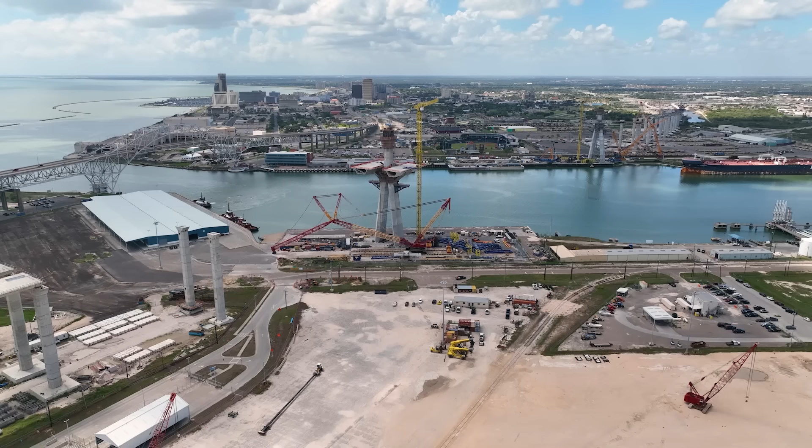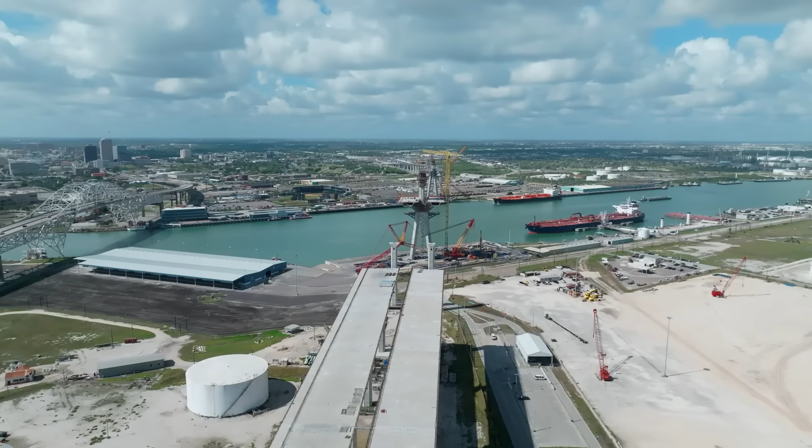In July of 2022, the Texas Department of Transportation issued an emergency suspension of work on the half-finished Harbor Bridge project in Corpus Christi, citing serious design flaws that could cause the main span to collapse if construction continues. The bridge is a high-profile project and, when constructed, might briefly be the longest cable-stayed bridge in North America.

It's just down the road from me, and I've been looking forward to seeing it finished for years. But it's actually not the first time this billion-dollar project has been put on hold. In a rare move, TxDOT released not only their letters to the bridge developer, publicly castigating the engineer and contractor, but also all the engineering reports with the details of the alleged design flaws.

It's a situation you never want to see, especially when it's your tax dollars paying for the fight. But it is an intriguing look into the unique challenges in the design and construction of mega projects. Let's take a look at the fascinating engineering behind this colossal bridge and walk through the documents released by TxDOT to see whether the design flaws might kill the project altogether.

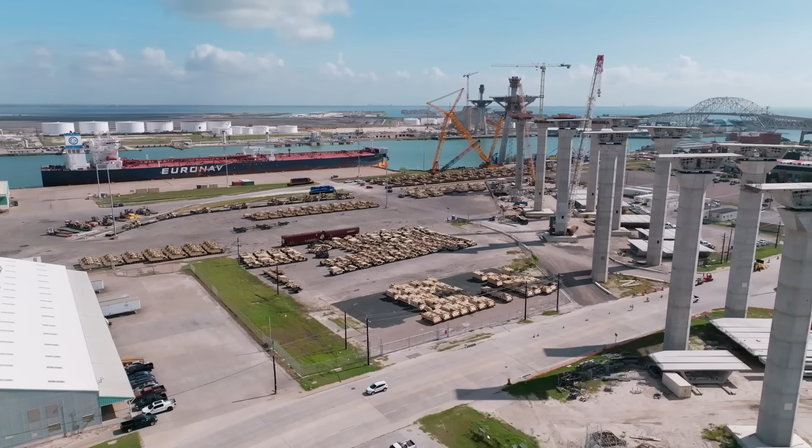Corpus Christi is a medium-sized city located on the Gulf Coast of South Texas. But even though the city is well down the list of the largest metropolitan areas in the state, it has one of the fastest growing cargo ports in the entire United States. The port of Corpus Christi is now the third largest in the country by tonnage, due primarily to the enormous exports of crude oil and liquefied natural gas.

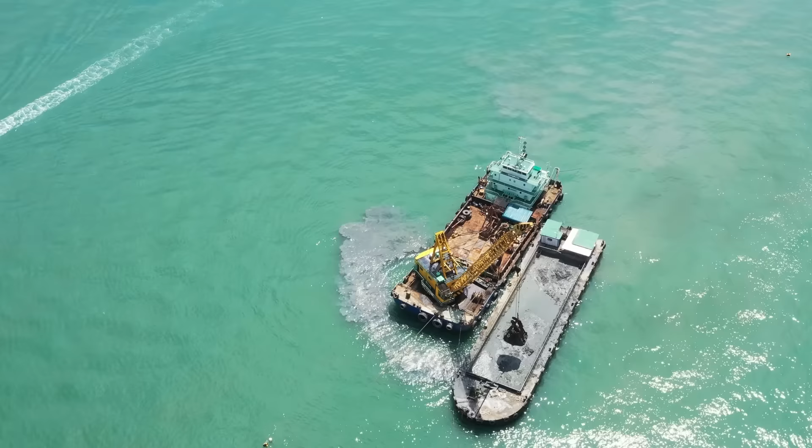But there are a couple of limitations to the port that are constraining its continued growth. One is the depth and width of the ship channel, which is currently in the process of being deepened and widened. Dredging soil from the bottom of a harbor is an engineering marvel in its own right, but we'll save that for another video. The second major limitation on the port is the Harbor Bridge.

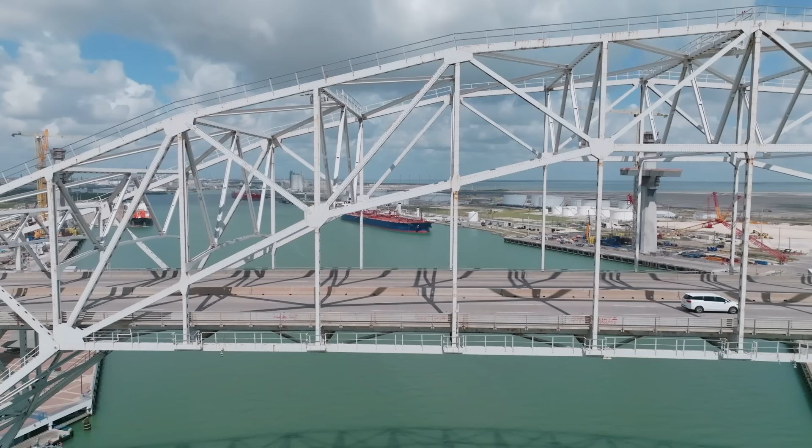Built in 1959, this bridge carries U.S. Highway 181 over the Corpus Christi ship channel, connecting downtown to the North Shore area. When it was constructed, the Harbor Bridge was the largest project ever to be constructed by the Texas Highway Department, later known as TxDOT. It was the pinnacle of bridge engineering and construction for the time, allowing the Army Corps of Engineers to widen the channel below so that the newest supertanker ships of the time could enter the port. The Harbor Bridge fueled a new wave of economic growth in the city, and it's still an impressive structure to behold, if you don't look too closely.

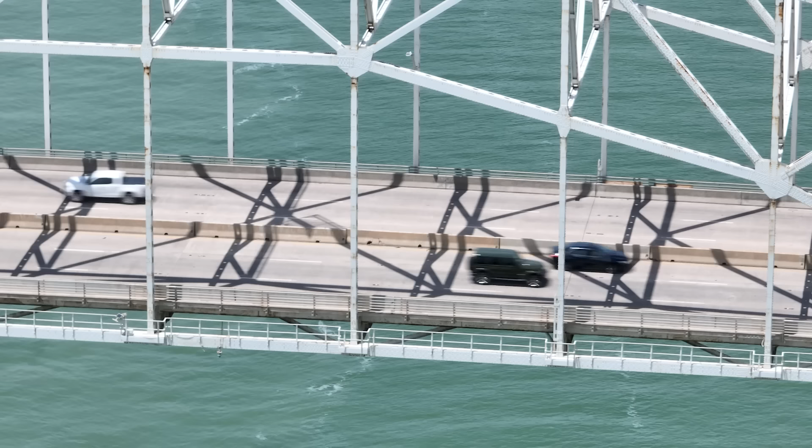Now, more than 60 years later, the bridge is a relic of past engineering and past needs. The Harbor Bridge has endured a tough life above the salty Gulf Coast, and the cost to keep corrosion at bay has increased substantially year by year. The bridge also lacks pedestrian and bicycle access, meaning the only way across the ship channel is in a watercraft or a motor vehicle, which is not ideal. Finally, the bridge is a bottleneck on the size of ships that can access the port, keeping them from entering or exiting fully loaded and creating an obstacle to commerce within Corpus Christi.

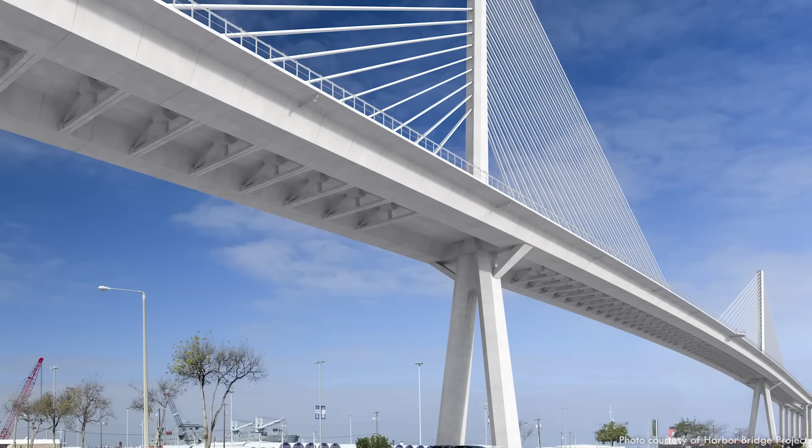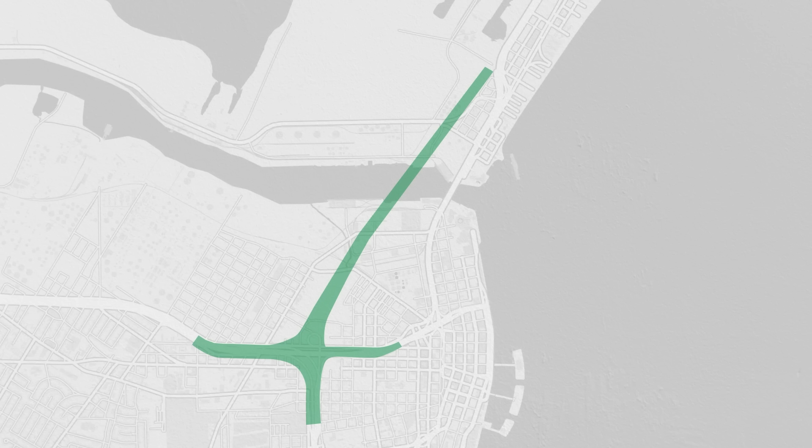So, in 2011, over a decade ago now, the planning process began for a taller and wider structure. The new Harbor Bridge project includes 6.5 miles, or about 10 kilometers, of new bridge and roadway that will replace the existing Harbor Bridge over the Corpus Christi ship channel. And here's a look at how the two structures compare. The new bridge will allow larger ships into the port with its 205 feet or 62 meters of clearance above the water.

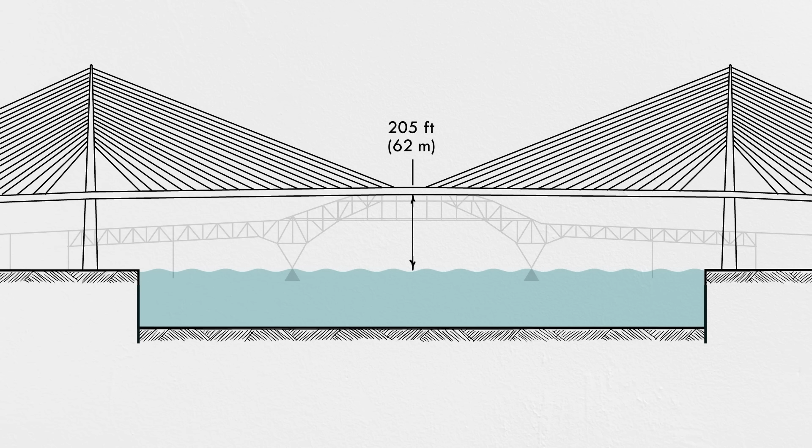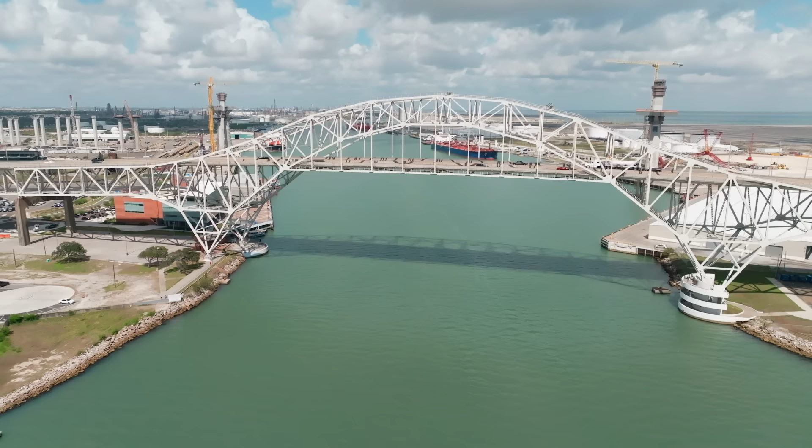The bridge is being built just a short distance inland from the existing Harbor Bridge, which is a good thing for us because the Port Authority wouldn't give us permission to cross the old bridge with a drone. It will eventually be demolished at the end of construction. The project also requires lots of roadway reconfigurations in downtown Corpus Christi that will connect the new bridge to the existing highway.

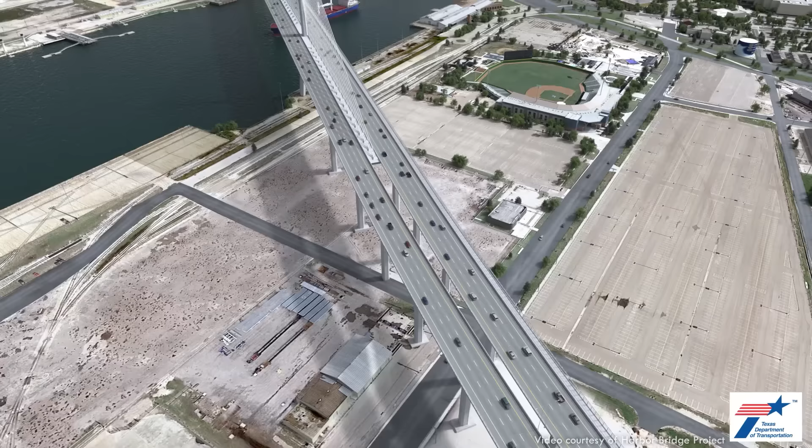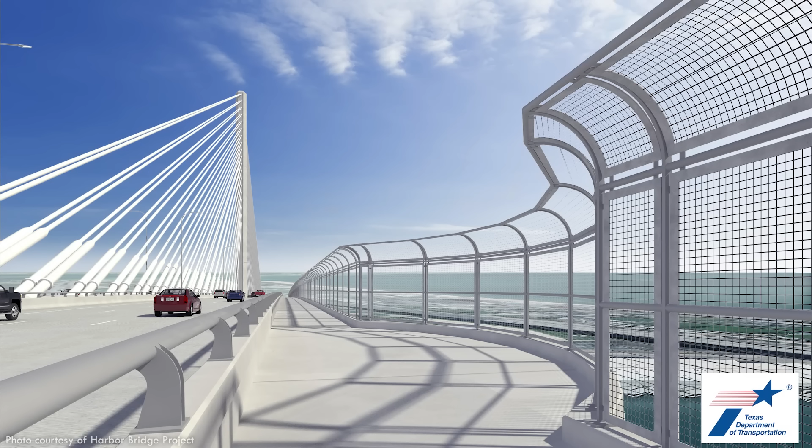The crown jewel will be the cable-stayed main span, supported by two impressive pylons on either side of the ship canal, across 1,661 feet or 506 meters. The bridge will feature 3 lanes of traffic each way, plus a bicycle and pedestrian shared use path with a belvedere mid-span that will give intrepid ramblers an impressive view of Corpus Christi Bay.

The project was procured as a design-build contract, awarded to a joint venture between Dragados USA and Flatiron Construction, 2 massive construction companies with a huge group of subcontractors and engineers to support the project. Design-build, or DB for those in the industry, really just means that the folks who design it and the folks who build it are on the same team and work hopefully in collaboration to deliver the final product.

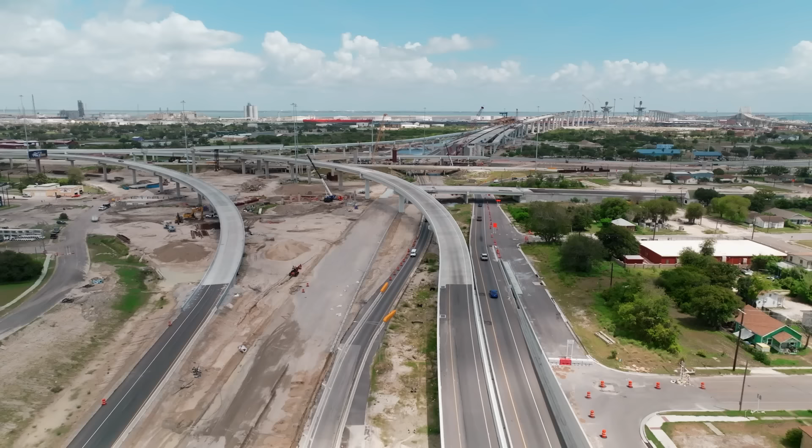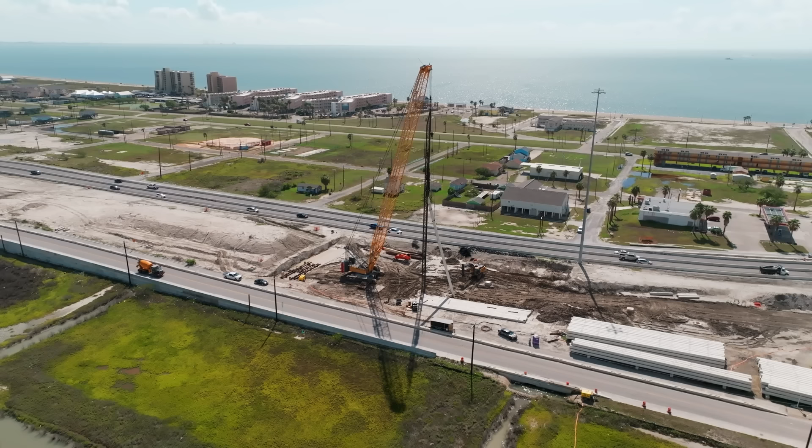That's a good thing in a lot of ways, and design-build contracts on large projects often end up moving faster and being less expensive than similar jobs that follow the traditional design-bid-build model, where the owner hires an engineer to develop designs and then bids the designs out to hire a separate qualified contractor. When an engineer and contractor work together to solve problems collaboratively, you often end up with innovative approaches and project efficiencies that wouldn't be possible otherwise. You also don't have to wait for all the engineering to be finished before starting construction on the parts that are ready, so the two phases can overlap somewhat.

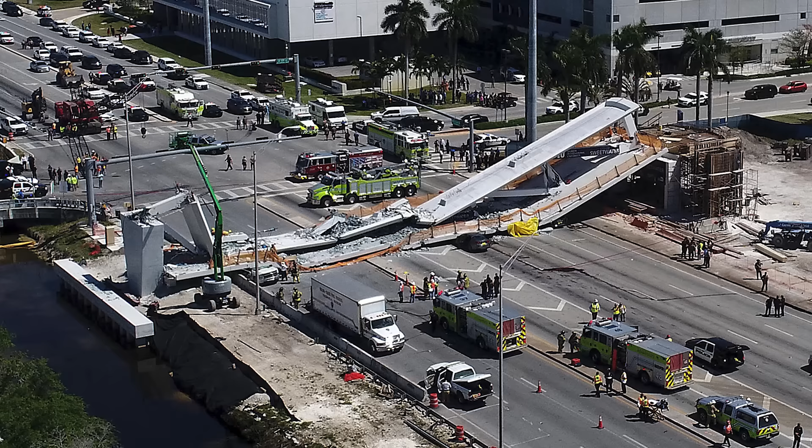However, as we'll see, DB contracts come with some challenges too. When the engineer and contractor are in cahoots, legally speaking, the owner of the project is no longer in the middle, and so has less control over some of the major decisions. Also, DB contracts force the engineer and contractor to make big decisions about the project very early in the design process, sometimes before they've even won the job, which reduces flexibility for changes as the project matures. Construction on the New Harbor Bridge project started in 2016 with an original completion date of 2020. But another bridge halfway across the country would soon throw the project into disarray.

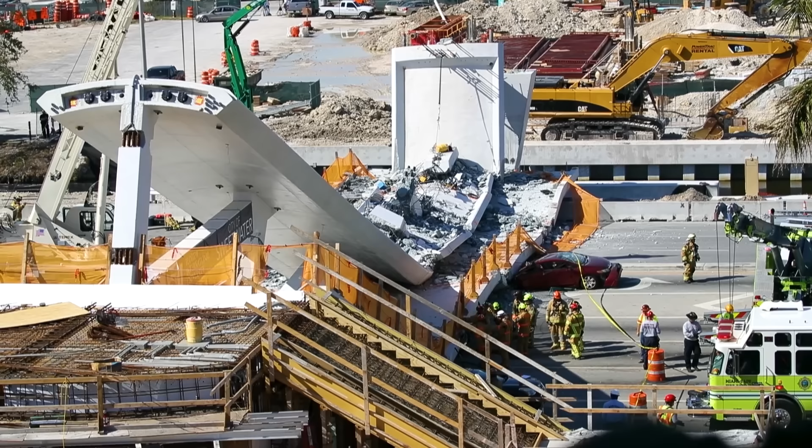In March of 2018, a pedestrian bridge at Florida International University in Miami collapsed during construction, killing 6 people and injuring 10 more. After an extensive investigation, the National Transportation Safety Board put most of the blame for the bridge collapse on a miscalculation by the engineer, FIGG, the same engineer hired by Flatiron and Dragados to design the New Harbor Bridge project in Texas. I should note that FIGG disputes the NTSB's assessment and has released their own independent analysis pinning the blame for the incident on improper construction.

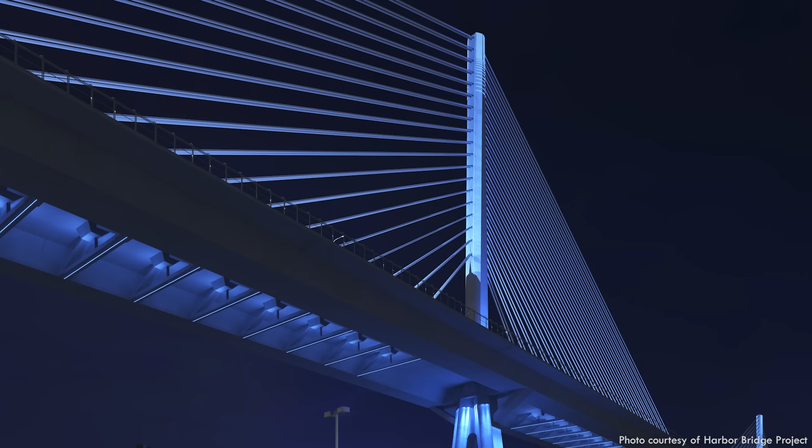Nevertheless, the FIU collapse led TxDOT to consider whether FIGG was the right engineer for the job. In November of 2019, they asked the DB contractor to suspend design of the bridge so they could review the NTSB findings and conduct a safety review. And only a few months later, TxDOT issued a statement that they had requested their contractor to remove and replace FIGG bridge engineers from the design of the main span bridge. That meant a new engineering firm would have to review the FIGG designs, recertify all the engineering and calculations, and take responsibility for the project as the engineer of record.

Later that year, FIGG would be fired from another cable-stayed bridge project in Texas, and in 2021, they were debarred by the Federal Highway Administration from bidding on any projects until 2029. It took about 6 months for the New Harbor Bridge DB contractor to procure a new engineer for the main span. The contractor said it expected no major changes to the existing design.

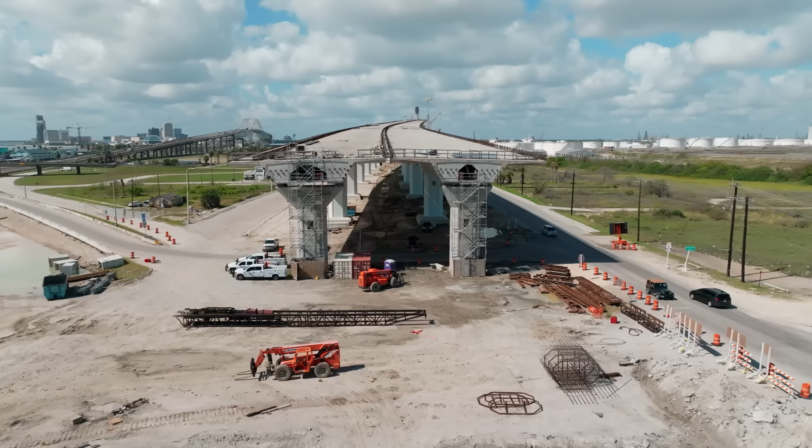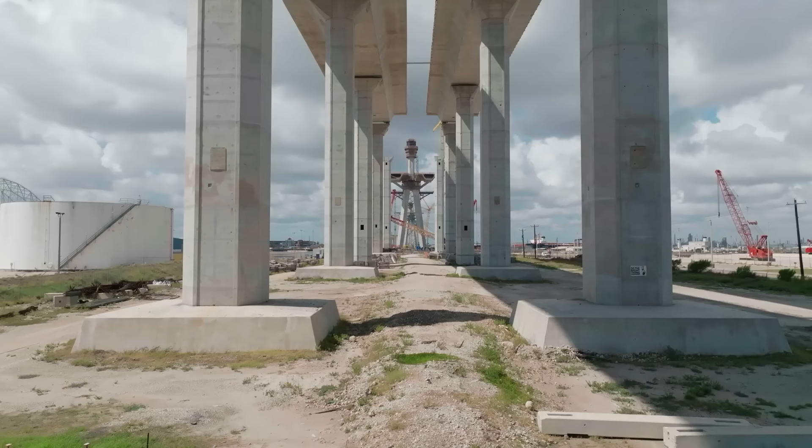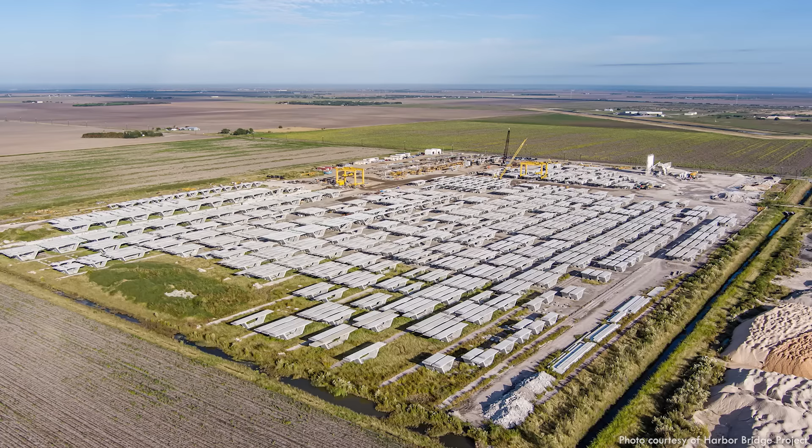Construction on the project forged ahead through most of the shakeup, with steady progress on both of the approach bridges that lead to the main span. These are impressive structures themselves, with huge columns supporting each span above. The bridge superstructure consists of 2 rows of segmental box girders, massive elements that are precast from concrete at a site not far from the bridge.

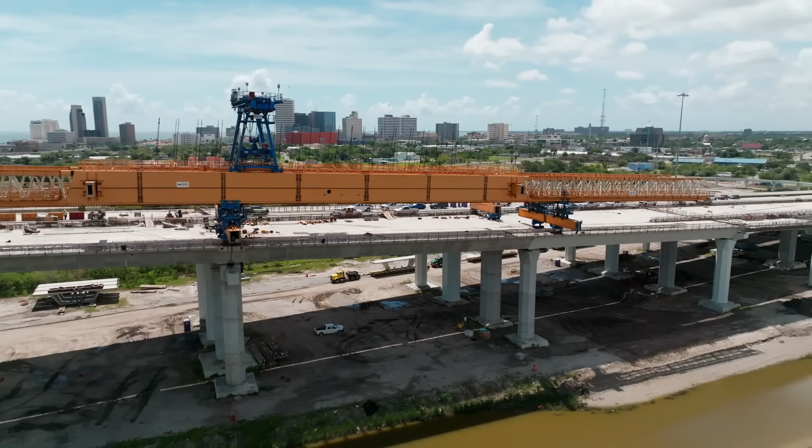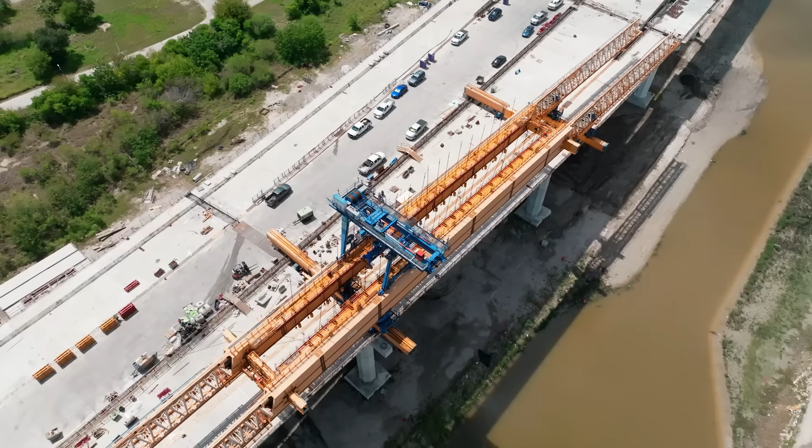For each approach, these segments are lifted and held in place between the columns using an enormous self-propelled gantry crane. Once all the segments within a span are in place, steel cables called tendons are run through sleeves cast into the concrete and stressed using powerful hydraulic jacks. When the post-tensioned tendons are locked off, the span is then self-supporting, and the crane can be moved to the next set of columns.

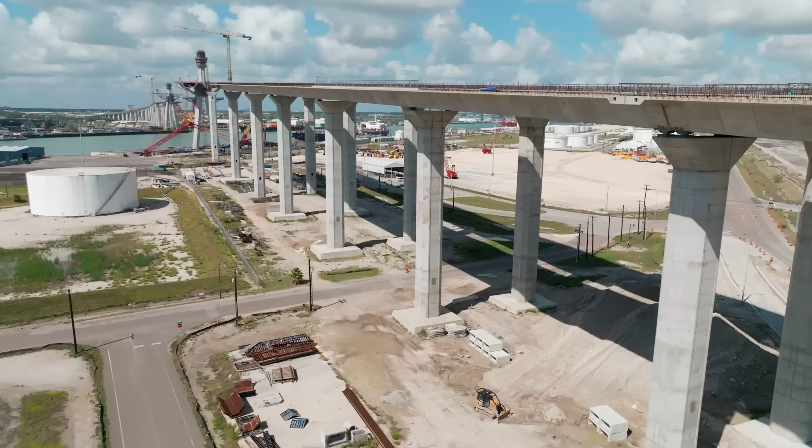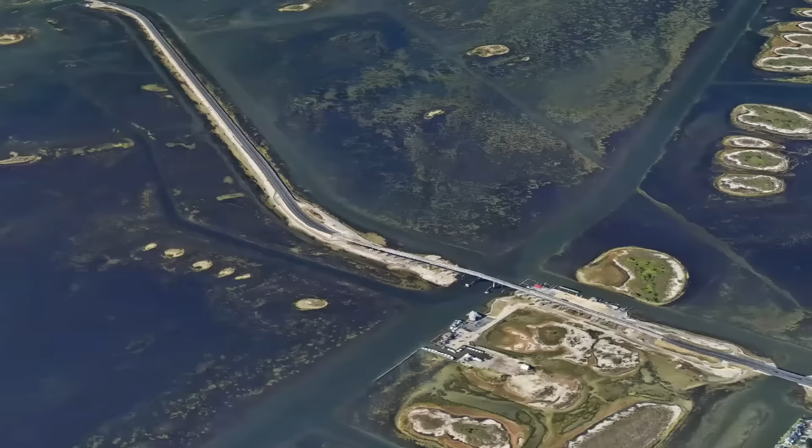This segmental construction is an extremely efficient way to build bridges. It's used all over the world today, but it actually got its start right here in Corpus Christi. The JFK Memorial Causeway Bridge was replaced in 1973 to connect Corpus Christi to North Padre Island over the Laguna Madre. It was the first precast segmental bridge constructed in the US.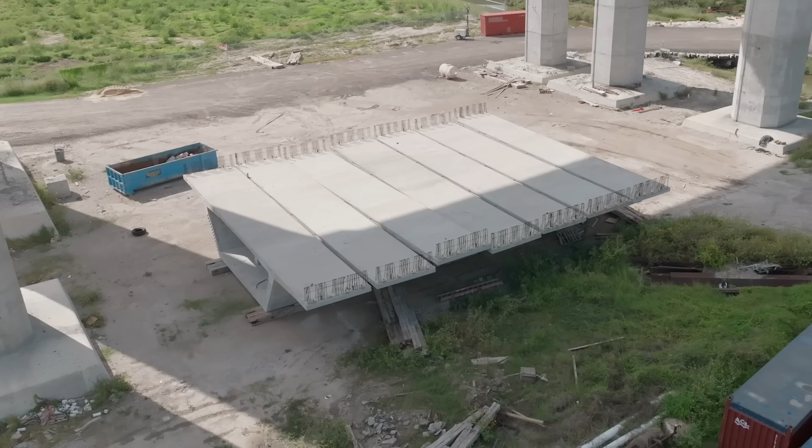And if you're curious, yes, qualified personnel can get inside the box girders. It's a convenient way to inspect the structural members to make sure the bridge is performing well over the long term. The Harbor Bridge project will include locked entryways to the box girders and even lights and power outlets within.

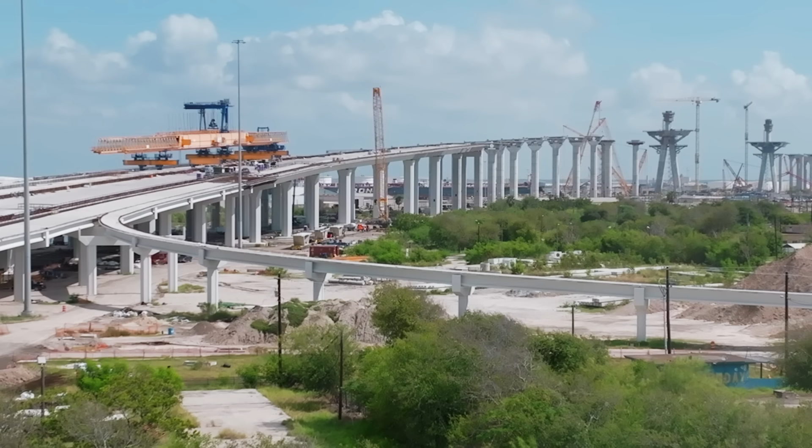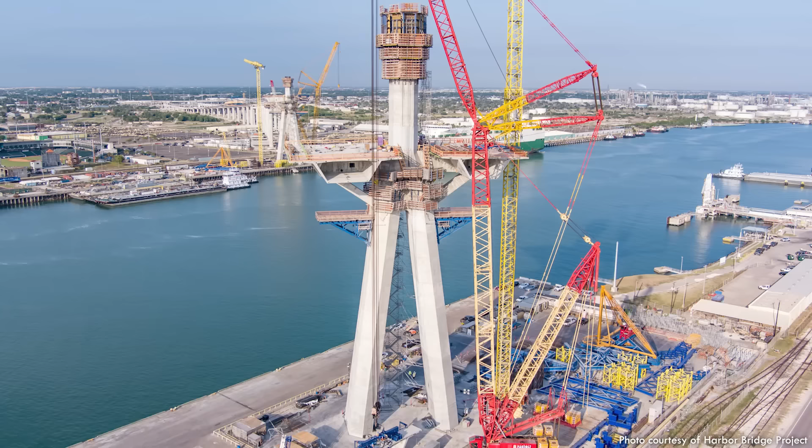Work on the main span bridge didn't resume until August of 2021, nearly 2 years after TxDOT first suspended the design of this part of the project. And by the end of 2021, both pylons were starting to take shape above the ground. Early this year, the contractor mobilized 2 colossal crawler cranes to join the tower cranes already set up at both the main span pylons. These crawlers were used to lift the pier table segments where the bridge superstructure connects to the approaches.

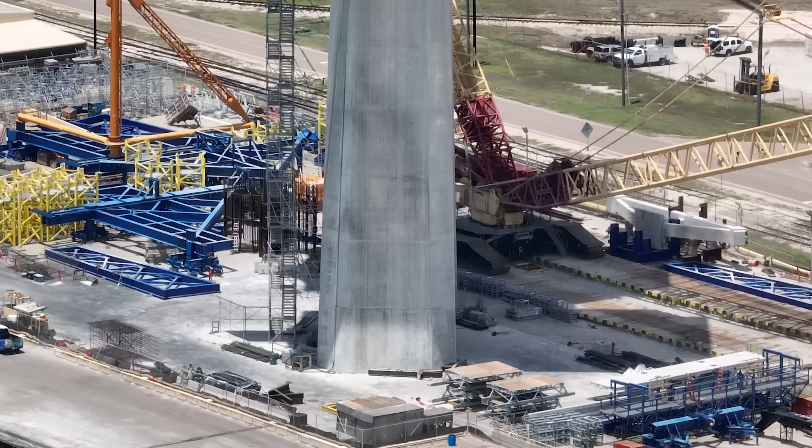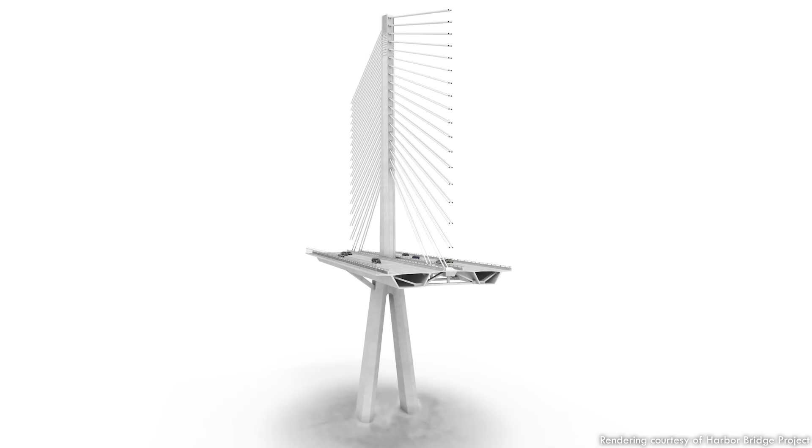The next step in construction is to begin lifting the precast box girder sections into place while crews continue building the pylons upward toward their final height. Rather than doing the entire span at once, these segments will be lifted into place using a balanced cantilever method, where each one is connected to the bridge from the pylon outward. But it probably won't happen anytime soon after TxDOT suspended construction on the main span in July and has continued a very public feud with the contractor since then that's far from resolved.

During the shakeup with FIGG, TxDOT hired their own bridge engineer to review the designs and inform their decision that ultimately ended with FIGG fired from the project. When the DB contractor hired a new engineer to recertify the bridge designs, TxDOT kept their independent engineer to review the new designs. Unfortunately, many of the flaws identified in the FIGG design persisted into the current design of the bridge. In April of 2022, TxDOT issued the contractor a notice of non-conforming work.

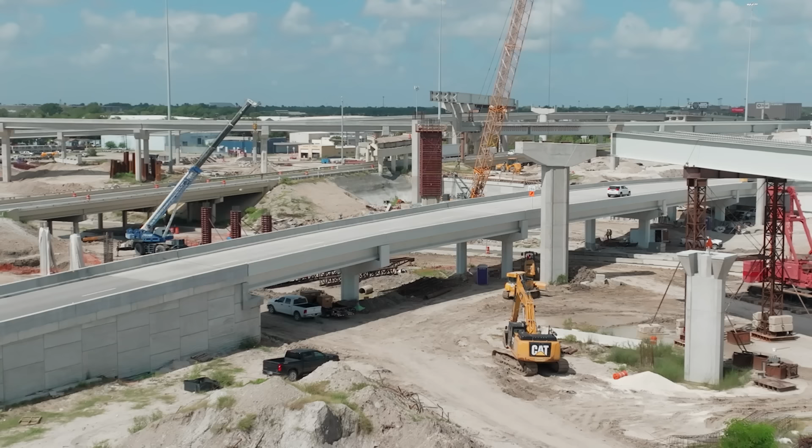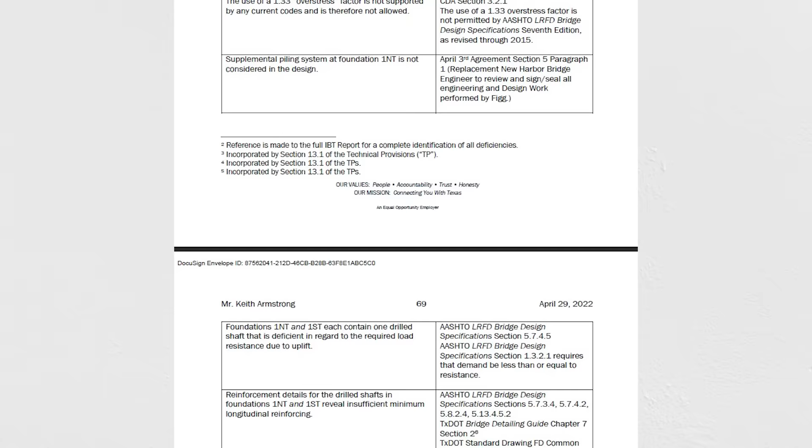This is a legal document in a construction project used to let a contractor know that something they built doesn't comply with the terms of the contract. And when that happens, it's the contractor's job to fix the non-conforming work at their own cost. The notice included the entire independent review report and a summary table of 23 issues that TxDOT said reflected breaches of the contract, and it required their contractor to submit a schedule detailing the plan to correct the non-conforming work. But they didn't provide that schedule, or at least not to TxDOT standards.

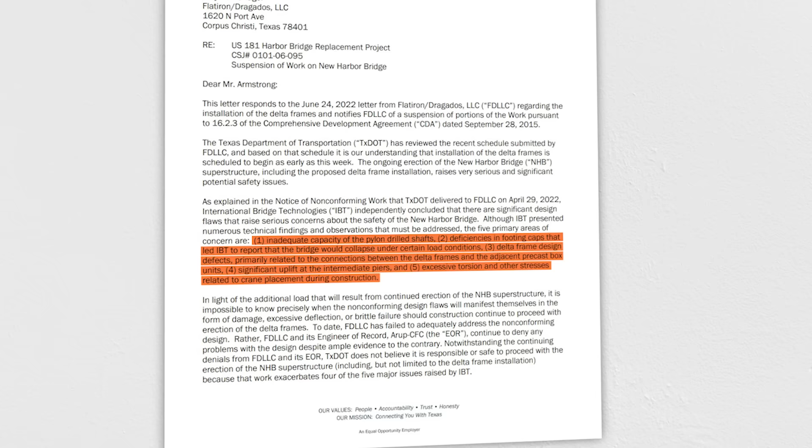So, in July, TxDOT sent another letter enacting a clause in the contract that lets them immediately suspend work in an emergency situation that could cause danger to people or property, citing 5 serious issues with the design of the main span. So let's take a look at them.

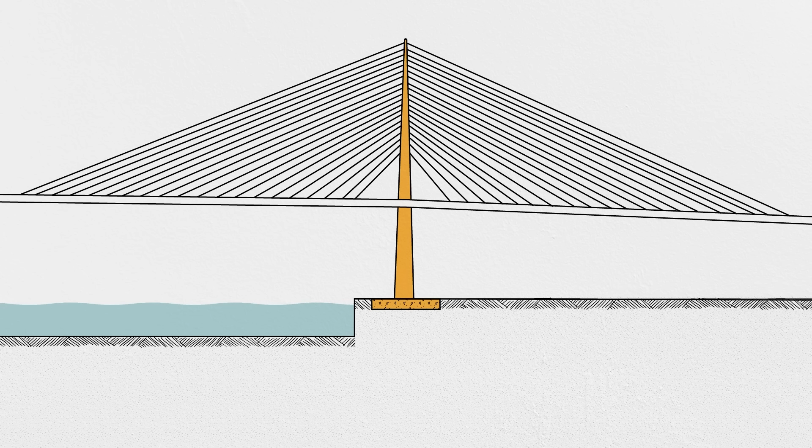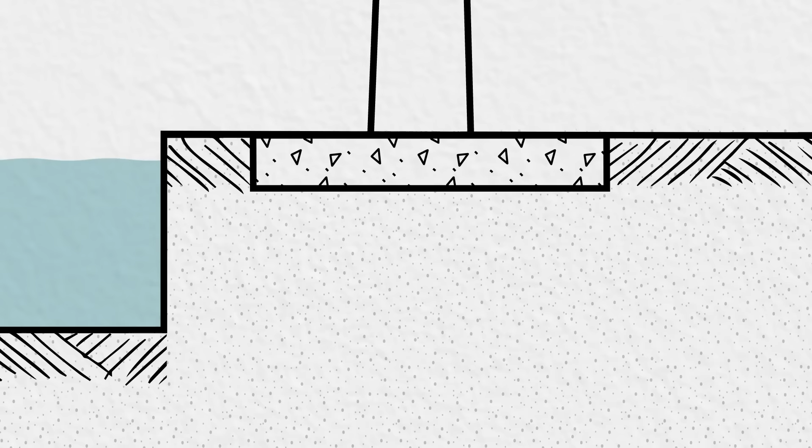The first 2 of the alleged flaws are related to the capacity of the foundation system that supports each of the 2 pylons. Each tower sits on top of an enormous concrete slab, or cap, that is the area of 2 basketball courts and 18 feet, or 5.5 meters thick. Below that slab are drilled shaft piles, each one about 10 feet or 3 meters in diameter and 210 feet or 64 meters deep.

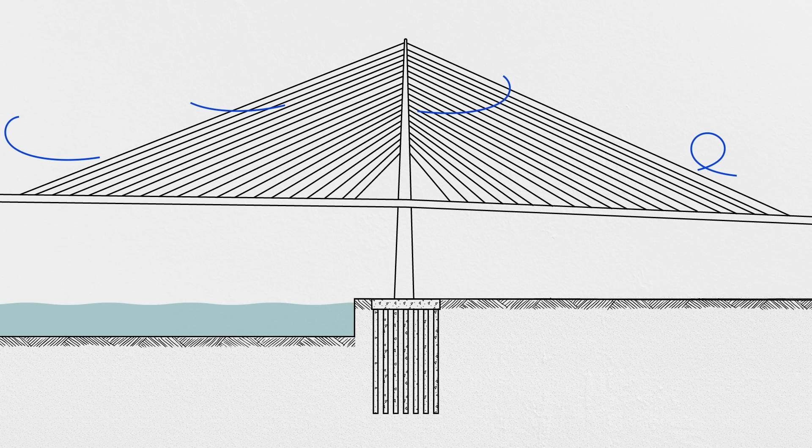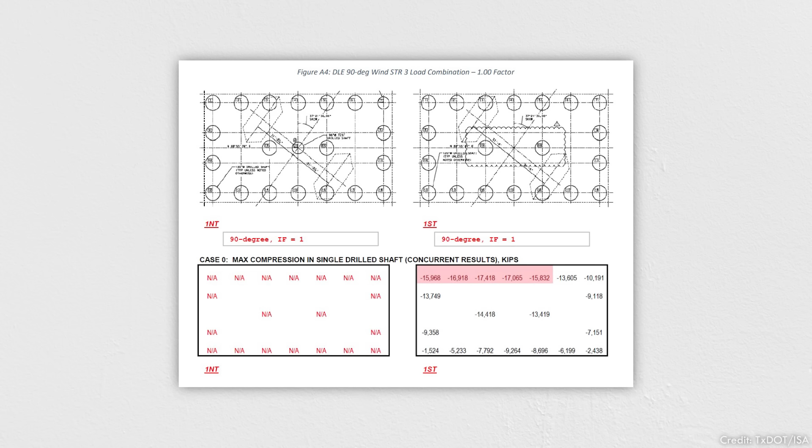The primary design error identified in the analysis was that the original engineer had assumed that the pile cap, that concrete slab between the tower and the piles, was perfectly rigid in the calculations. All of engineering involves making simplifying assumptions during the design process. Structures are complicated, soils are variable, loading conditions are numerous.

So, to make the process simpler, we neglect factors that aren't essential to the design. And with a pile cap that is greater in depth than most single-story buildings, you might think it's safe to assume that the concrete isn't going to flex much. But we're talking about extreme loads.

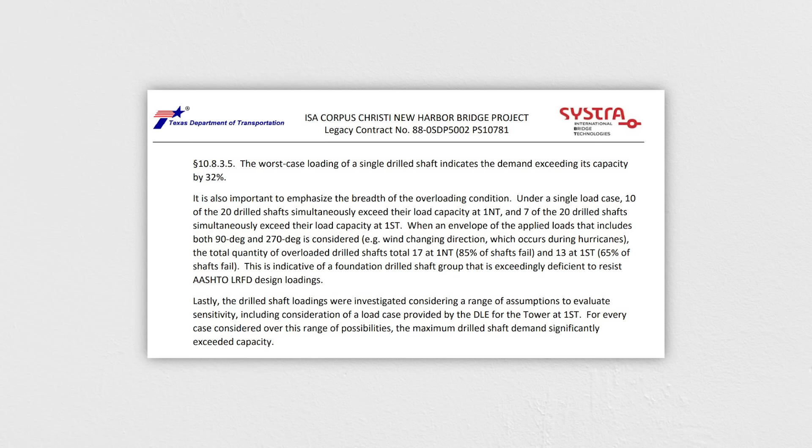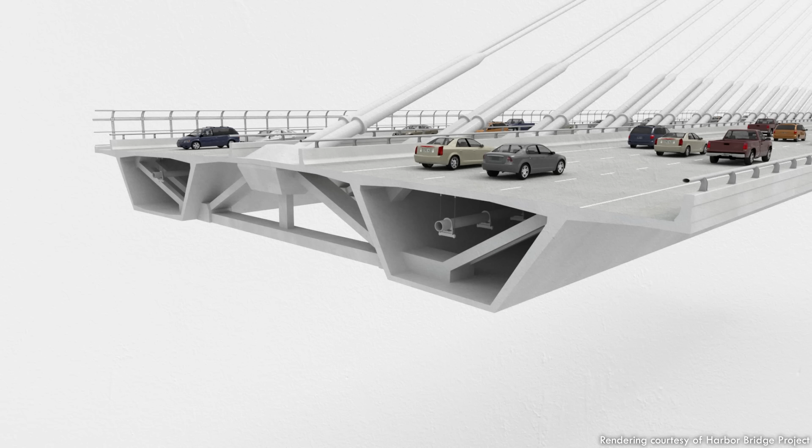When you take into account the flexibility of the pile cap, you find out that the stresses from the pylon aren't distributed to each pile evenly. Instead, some become overloaded, and you end up with a foundation that the design reviewer delicately labeled as exceedingly deficient to resist design loadings.

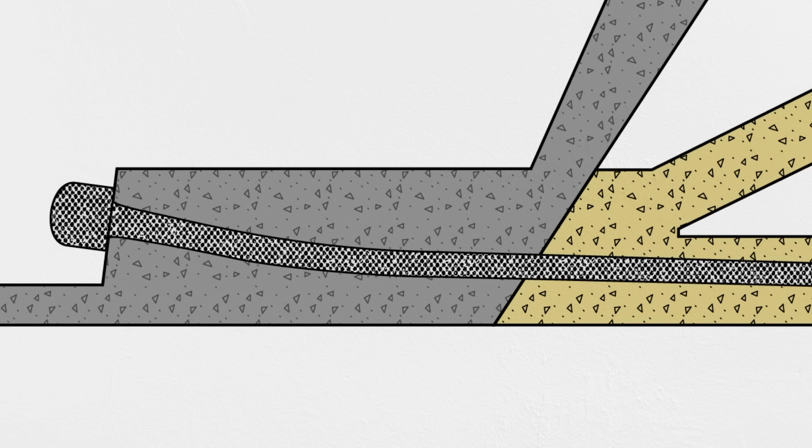The next critical design problem identified is related to the delta frame structures that transfer the weight of the bridge's superstructure into each cable stay. These delta frames connect to the box girders below the bridge deck using post-tension tendons. But these tendons can't be used to resist shear forces, those sliding forces between the girders and the delta frames. For those forces, according to the code, you need conventional steel reinforcement through this interface. Without it, a crack could develop and the interface could shear apart.

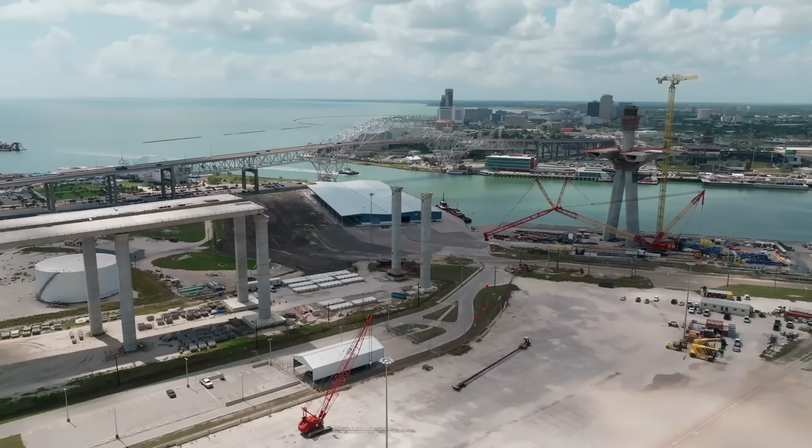The fourth issue identified is related to the bearings that transfer the weight of the bridge deck near each pylon. The independent reviewer found that under some load conditions, the superstructure could lift up rather than pushing down on the tower. That would not only cause issues with the bearings themselves, which need to be able to resist movement in some directions while allowing movement in others, it would also cause loads to redistribute, reducing the stiffness of the bridge that depends on a rigid connection to each tower.

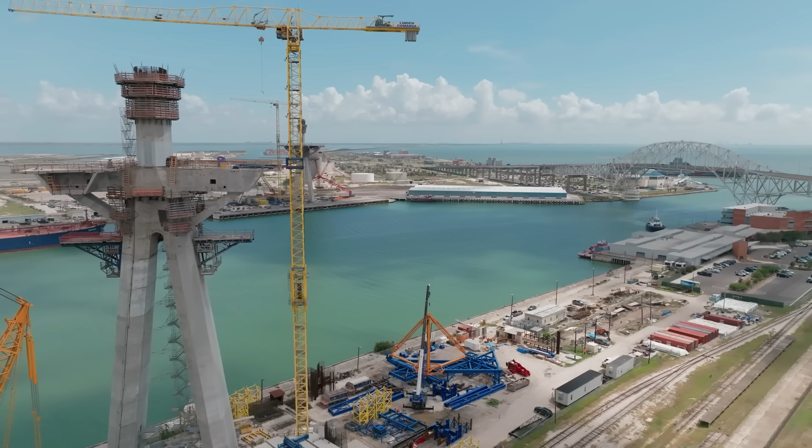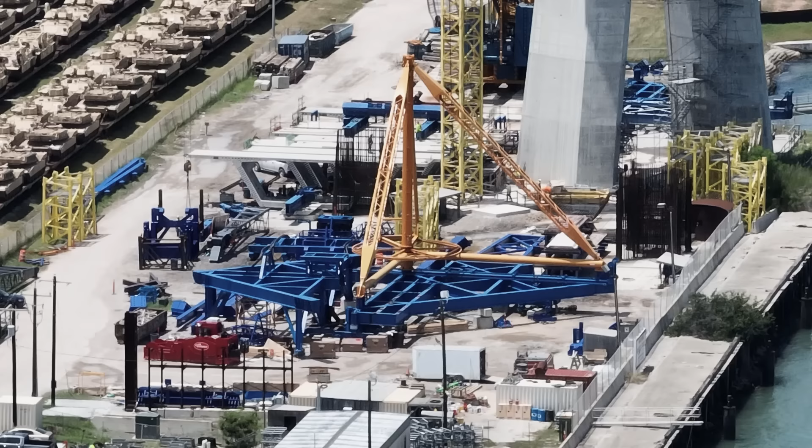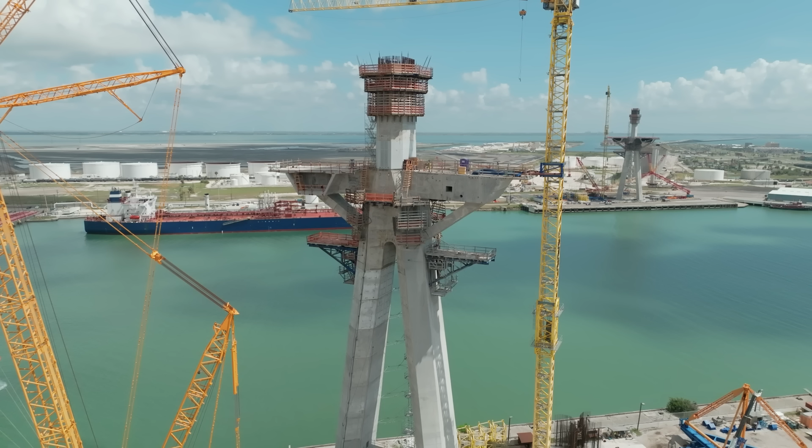The final issue identified, and the most urgent, is related to the loads during construction of the bridge. Construction is a vulnerable time for a bridge like this, especially before the deck is connected between the pylons and the first piers of the approaches. The contractor's planning to lift derrick cranes onto the bridge deck that will be used to hoist the girder segments into place and attach them to each cable stay. TxDOT and their independent reviewer allege that the bridge isn't strong enough to withstand these forces during construction and will need additional support or more reinforcement.

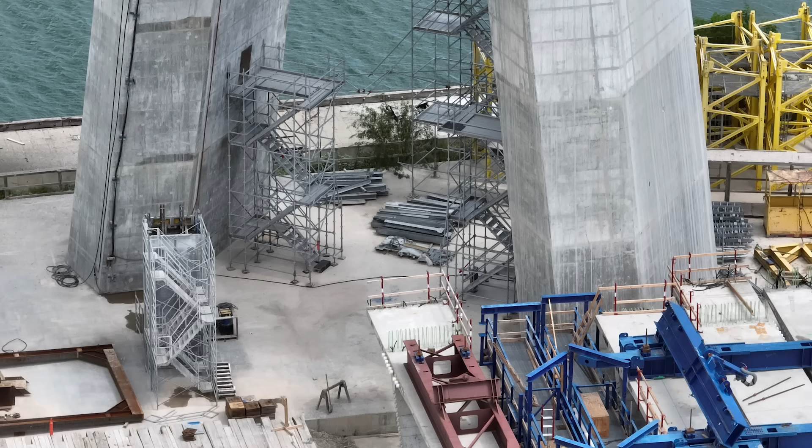For the contractor's part, they have denied that there are design issues and issued a statement to the local paper saying that they were confident in the safety and durability of the bridge as designed. In their letter to TxDOT, they cite their disagreements with the conclusions of the independent design reviewer and accuse TxDOT of holding back the results of the review while allowing them to continue with construction and ignoring attempts to resolve the differences. Because of TxDOT's directive to suspend the work, they've already started demobilizing at the main span, reassigning crews, and reallocating resources. In August, TxDOT sent another letter notifying the contractor of a default in the contract and giving them 15 days to respond.

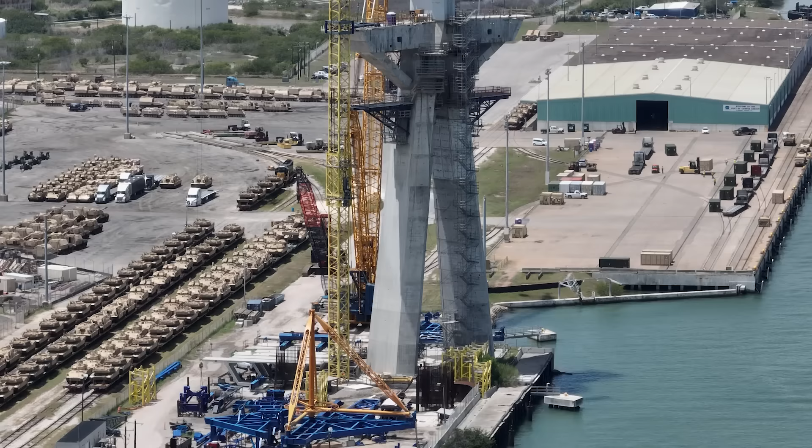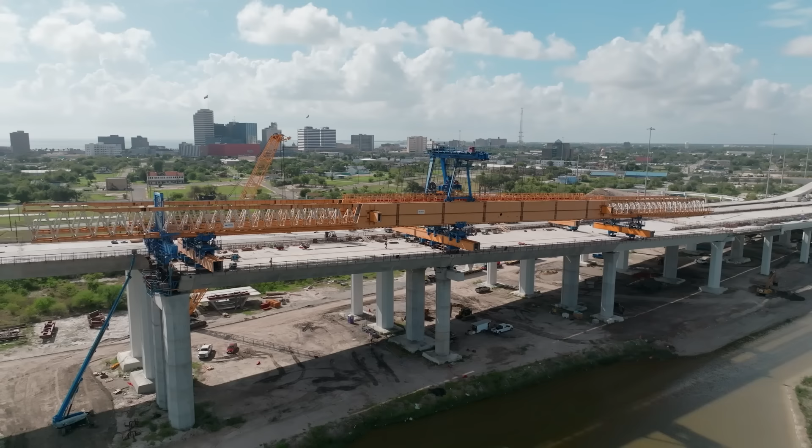It's hard to overstate the disruption of suspending work in this way. Construction projects of this scale are among the most complicated and interdependent things that humans do. They don't just start and stop on a dime. And these legal actions will have implications for thousands of people working on the new Harbor Bridge project. Just the daily rental fees of these 2 crawler cranes alone is probably in the tens of thousands of dollars per day. Add up all the equipment and labor on a job this size, and you can see that the stakes are incredibly high when interrupting an operation like this. It's never a good sign when the insurance company is CC'd on the letter.

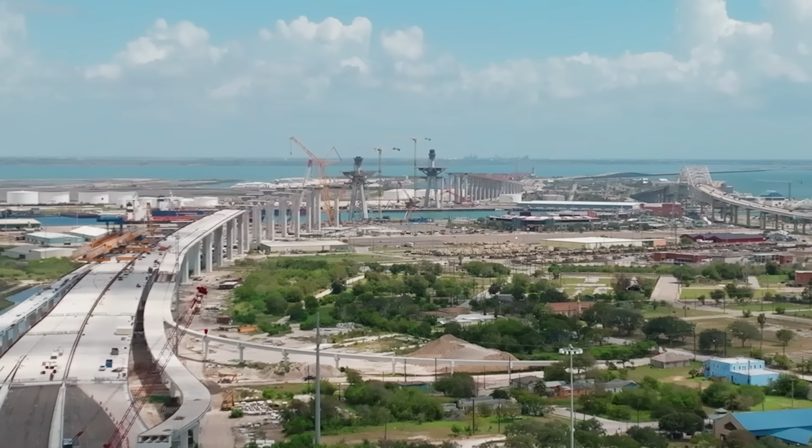If the bridge design is truly flawed, and clearly TxDOT thinks that it is since they're sharing the evidence publicly, it's a good thing that they stop the work so the issues can be addressed before they turn into a dangerous situation for the public. But it also begs the question of why these concerns were handled in a way that let the contractor keep working even when TxDOT knew there were issues. Mega projects like this are immensely complex, and their design and construction rarely goes off without at least a few complications. There just isn't as much precedent for the engineering or construction. But we have processes in place to account for bumps in the road, and even bumps in the bridge deck.

Those processes include thorough quality control on designs before construction starts. So who's at fault here? Is it the DB contractor for designing a bridge, then recertifying that design with a completely new engineering team that apparently had a number of serious flaws? Or is it TxDOT for failing to catch the alleged errors, or at least failing to stop the work until the very last minute after hundreds of millions of taxpayer dollars have already been spent on construction that may now have to be torn down and rebuilt?

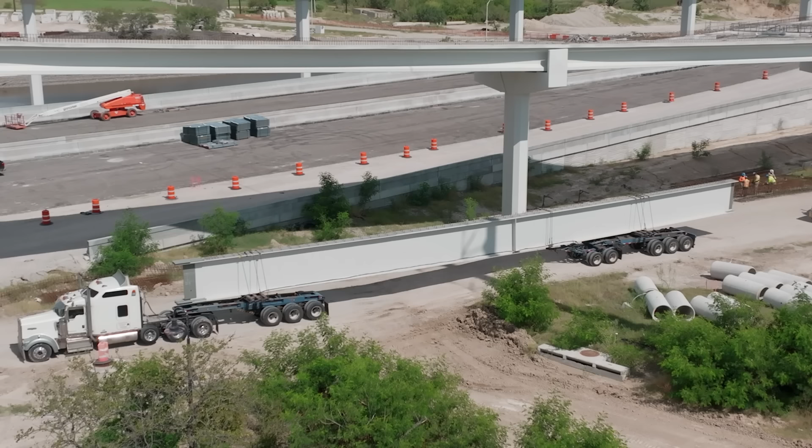The simple answer is probably both, but it's a question that's far from settled, and the battle is sure to be dramatic for those who follow infrastructure, if not discouraging for those who pay taxes. The design issues are serious, but they're not insurmountable, and I think it's highly unlikely that TxDOT won't see the project to completion in one way or another. Some work may have to be replaced, while other parts of the project may be fine after retrofits.

The best case scenario for everyone involved is for TxDOT to repair their relationship with the contractor and get the designs fixed instead of firing them and bringing on someone new. In the industry, they call that stepping into a dead man's shoes, and there won't be many companies jumping for a chance to take over this controversial job halfway through construction. Two things are for sure, as they almost always are in projects of this magnitude. The bridge is going to cost more than we expected, and it's going to take longer to build than the current estimated completion date in 2024.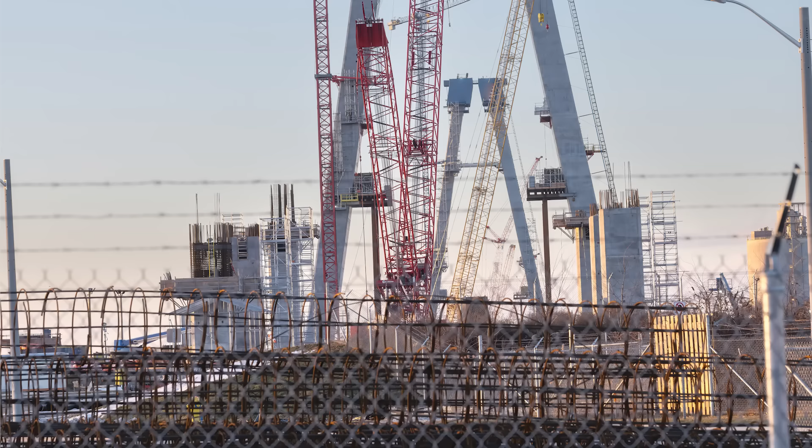There's actually another, much longer cable-stayed bridge racing to finish construction in the US and Canada between Detroit, Michigan and Windsor, Ontario. Barring any major issues, it's currently scheduled to be complete by the end of 2024, and will probably now beat the Corpus Christi project. Every single person who crosses over either one of those bridges, once they're complete, will do so as an act of trust in the engineers who designed them and the agencies who oversaw the projects. So I'm thankful that TxDOT is at least being relatively transparent about what's happening behind the scenes to make sure the new Harbor Bridge is safe when it's finished.

As someone who lives in South Texas, I'm proud to have this project in my backyard, and I'm hopeful that these issues can be resolved without too much impact to the project's schedule or cost. The latest headlines make it seem like things are headed in that direction. Until then, if you're in Corpus Christi crossing the ship channel, as you drive over the aging but still striking and still standing Old Harbor Bridge, you'll have a really nice view of an impressive construction site and what was almost the nation's longest cable-stayed bridge.